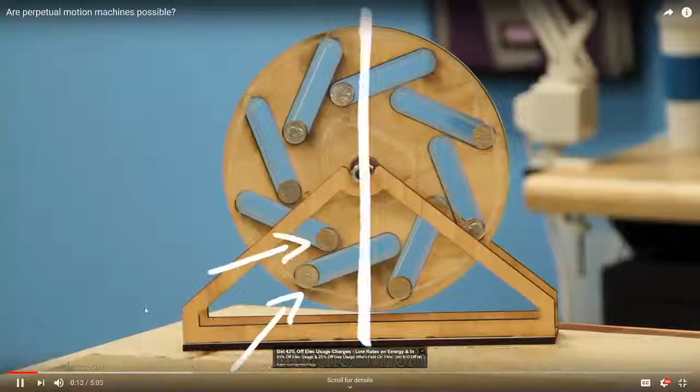What if I told you I built a machine that creates energy? My ingenious design works like this. As the wheel turns, the coins fall in the slots so that one side of the wheel is always heavier than the other, which would keep pulling that side down and the wheel would never stop turning. Without so much as a push, this wheel would spin forever. Think about the possibilities. I could build a giant fleet of wind turbines that turn without wind to power the entire Earth. We wouldn't have to burn fossil fuels anymore. This could solve climate change. So let's see it in action. Or not, because it doesn't actually work.

You may have seen this wheel before, and there's a reason it doesn't work. Well, physics, but also friction here on the axle, which will eventually stop any wheel from continuing to spin. But then there's also gravity. So what I said earlier about one side of the wheel being heavier than the other was misleading because of the way gravity works on wheels. Imagine a regular wheel. Its center of mass is at the center of the wheel.

Now imagine a wheel with a single coin in it. It might swing back and forth a couple times, but it won't rotate. Add a second coin, add a third coin. The wheel swings back and forth, slowing down until it stops where the center of gravity is at its lowest position, always. So the unbalanced wheel will swing back and forth like a sad pendulum until friction wins.

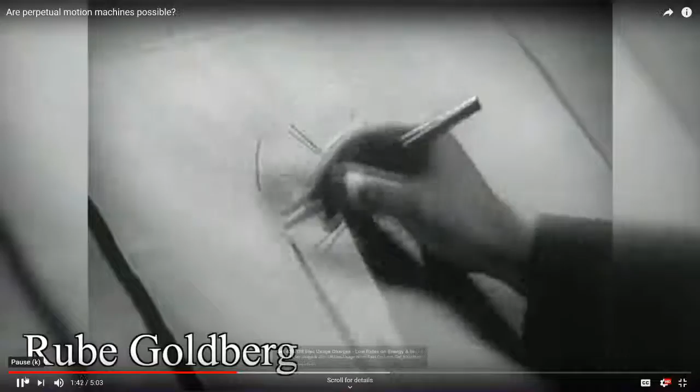This wheel is a perpetual motion machine, a device that is supposed to move without any energy. But by far the most persistent dream of inventors has been to get something for nothing. That is, to create a machine that will start itself, overcome all friction, and still have enough power left to do useful work. In short, perpetual motion machines.

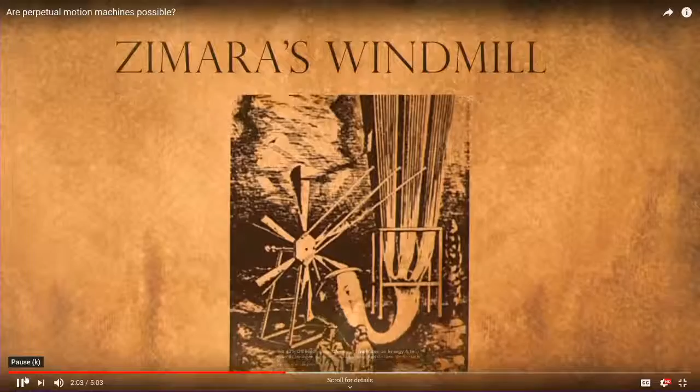In countless instances in history, people have claimed that they've made a perpetual motion machine. Bhaskara's unbalanced mercury wheel in the 1100s, Zimara's self-blowing windmill in the 1500s, the capillary bowl where capillary action forces the water upwards, the Oxford electric bell which ticks back and forth due to charge repulsion, and so on. In fact, the US Patent Office stopped granting patents for perpetual motion machines without a working prototype. The reason you've never heard of Cox's timepiece and you don't power your smartphone with a capillary bowl is that perpetual motion machines are the snake oil of physics. They are impossible.

This is the classic drinking bird toy. It tips itself into a glass of water, then rights itself and tips again over and over, looking forever thirsty. Where's the source of energy?

At room temperature, inside the bird is part liquid and part vapor. The bird contains a substance called dichloromethane, the same stuff in this little toy, which boils at a much lower temperature than water. When the bird dips its beak into the water, the bird's top cools down.

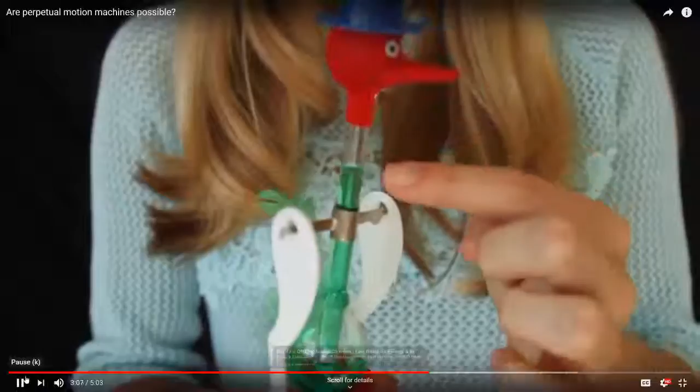Because of the ideal gas law, PV equals NKT, the pressure in the tube at the top of the bird is lower than the pressure in the bottom of the bird. This pressure difference pushes the liquid into the top of the head. The toy gets top heavy and tips over.

When the bird tips over, the bottom of the tube is exposed to the vapor, which rises up and pushes the liquid back into the bottom. The bird stands up and the cycle continues. But it's not perpetual motion. There is an energy source making this bird drink over and over, but it's hard to spot.

Yep, I'd like to stop here. So the question being asked is: there is an energy source actually driving the bird to tip and come back. Any idea? We will learn that in a minute, but any idea?

There is a hot reservoir transferring energy to the cold reservoir. What are the hot and cold? The hot source, maybe from where? Water.

That's the right direction of thinking. So where is the hot and cold reservoir? Yeah, that's pretty close. The ambient energy, which actually serves as the hot and the cold at the same time in this case. All right, that's good.

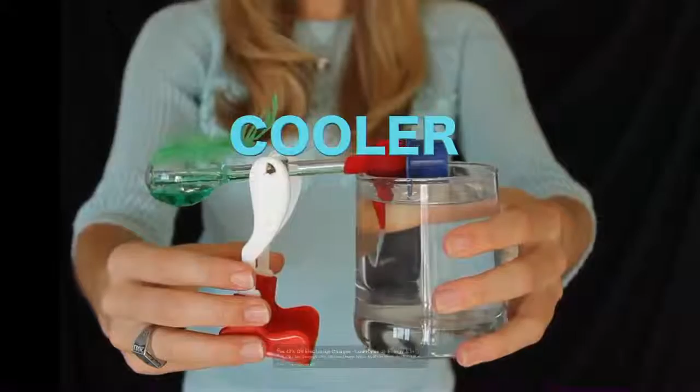The energy source for the bird is the ambient heat in the room. The water cooled the bird's beak, creating a temperature difference between the top and bottom, and that caused the pressure difference that made the liquid flow to the top and tipped the bird over. When the pressure equalized, the top and bottom of the bird became the same temperature, but slightly cooler than it started out. Then the room warms the bird up again, and that's where we see our energy source.

This back and forth between pressure and temperature is what causes Earth's weather. And though it seems like weather and wind and storms never stop, they're powered by the sun's heat. So even Earth's weather isn't a perpetual motion machine.

Now, there's a more fundamental reason why these machines are impossible, and it's called the law of conservation of energy, which states that energy can neither be created nor destroyed. Energy never comes for free. If you see a machine producing motion, heat, light, or another form of energy, keep looking for the energy source. I repeat, keep looking for the energy source.

So now you know. If anyone tells you they've built a perpetual motion machine, tell them to peddle their wares elsewhere. Thank you so much for watching.

It's all very simple. And so are you if you think it'll work. You can't get something for nothing. Yeah, so that's the main message coming out of here. You cannot get something for nothing. You have to, energy has to be balanced. So the in and out, or either generation, storage has to be balanced.

For this type of machine, if you want to know how it works, generally there are two ways. One is you give it certain energy to start with, then during the process there is very little loss. For example, for those unbalanced wheels, when turning, it must be sitting on an axle which is very well lubricated, so the wheel can run for a long time. So the loss is very small.

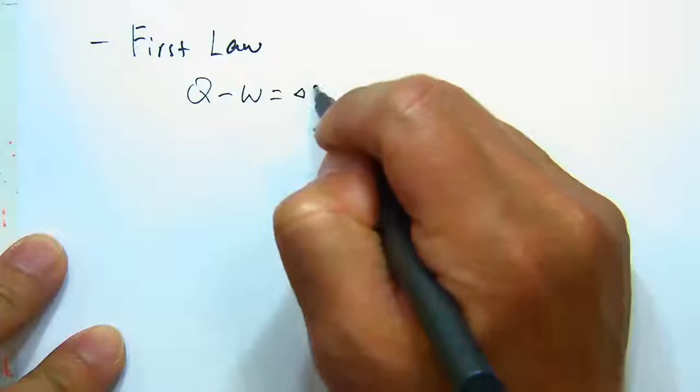All right, so the first law, we look at the equation of the first law, which is Q heat minus work equals the change in internal energy. That's applied to a closed system. The closed system is a simple compressible system, which is all the systems we encounter in this subject. And if you have an open system, which has a steady flow constantly going in and out of the system, there is another equation for that.

In this case, because the flow is going in and leaving the system, it requires energy to be pushed in and pushed out. So there is a term called flow energy, which stands for delta PV. Combine these two, you get the delta enthalpy.

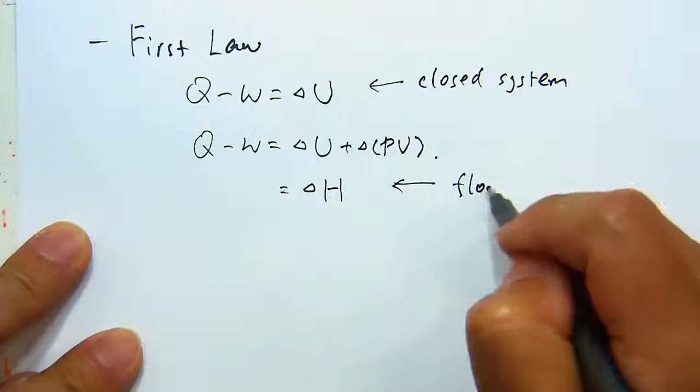All right, so this applied to the flowing system, or you can refer to it as an open system. So this equation, in certain textbooks, is called the non-flow energy equation, and this one is called the steady flow energy equation.

We said work and heat are path functions. Their change is determined by which route from one state to the other, so to determine them you really need to know how the process goes. But the energy terms, energy and enthalpy, are state functions, so they can be more directly, more straightforwardly calculated.

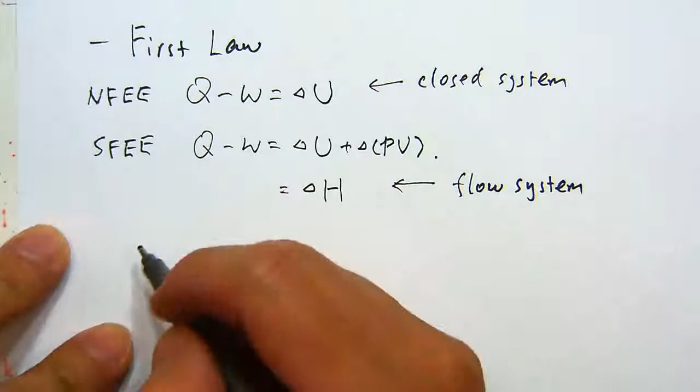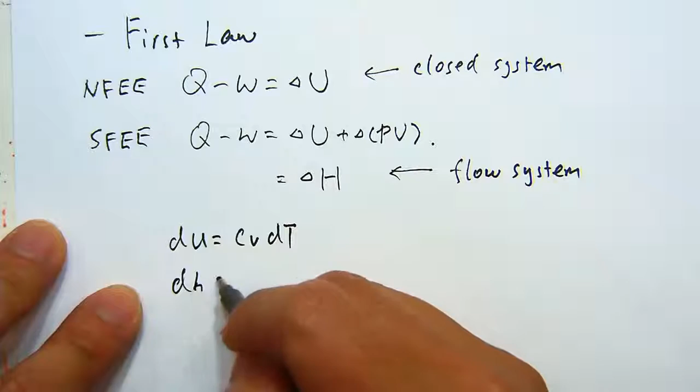So we know that dU, changing the internal energy, can be written as Cv dT, specific heat measured under constant volume condition, and the dH can be written as Cp dT. That should come from your previous learning. So Cp and Cv are the specific heats measured under different conditions.

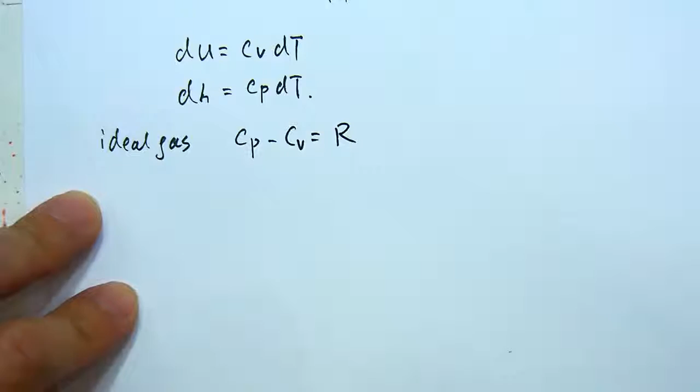And for gas, there is a clear difference between these two. So if we're talking about ideal gases, which are the gas we deal with here, ideal gas has a different Cp and Cv. Cp minus Cv equals the gas constant. And this gas constant can be calculated from the universal gas constant divided by the molecular weight of that gas. The universal gas constant is 8.314 joule per mole per Kelvin.

Right, so for ideal gases, Cp and Cv are different, and their ratio is called gamma, the ratio of specific heats. Because Cp is larger than Cv, gamma is always larger than 1. And there are some theoretical values known for this gamma.

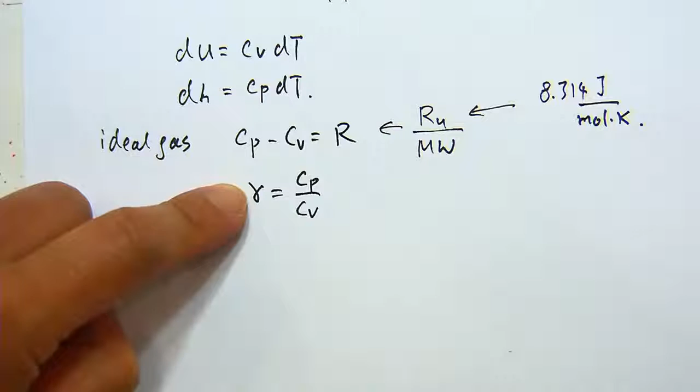So if you have a monoatomic gas like helium, argon, for those noble gases, the gamma is 1.67, basically 5 divided by 3. It's coming from statistical thermodynamics, but we don't really need to remember that here.

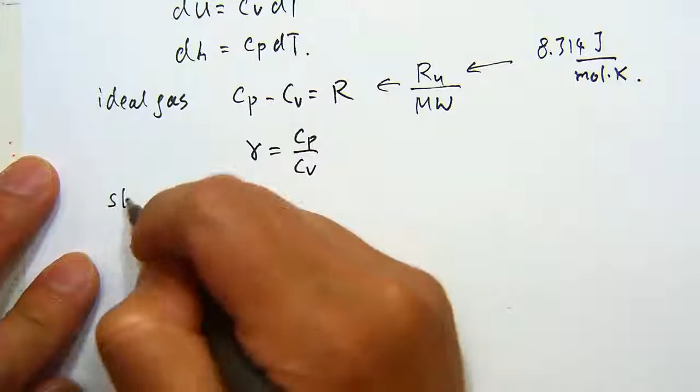For condensed matter, solid and liquid, the Cp and Cv are very similar. So in that case, when you want to determine the change dU and dH, they are basically the same, very similar at least, regardless of whether it's internal energy or enthalpy.

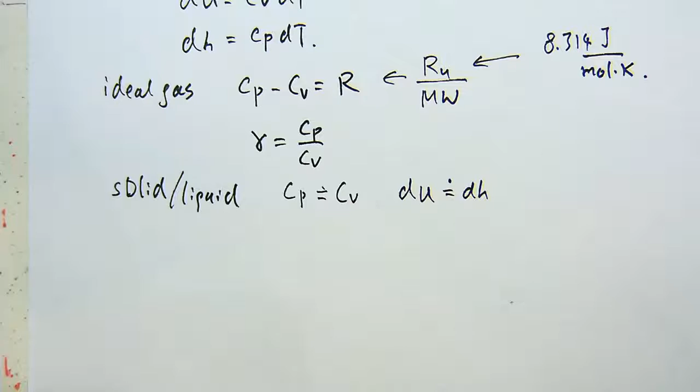All right, so that's the simple relations that we want to be aware of, and that's mainly coming from the first law.

Again, the first law is about energy balance. We said energy can be converted, thermodynamics is about energy being converted in different forms, then being transferred in and out of the system, with its surroundings. The first law just says everything has to add up to be equal. The source term and the sink term have to add up to be equal. Whether this form of energy is in terms of heat or work or chemical energy, it doesn't matter. As long as it's one form of energy, that which adds up together has to be equal. That's what the first law is about.

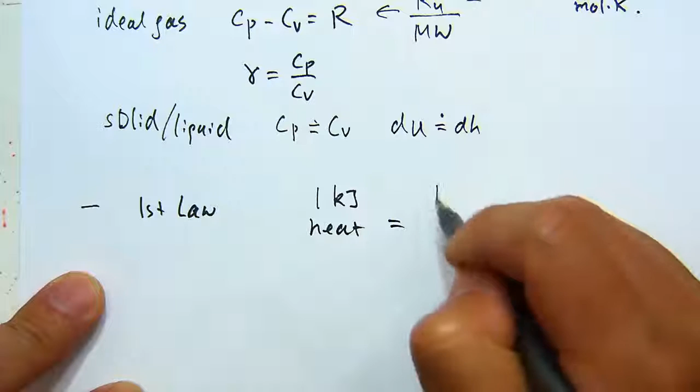So for example, if I have 1 kilojoule of heat, that equals 1 kilojoule of work. That's required by the first law, and that was actually proved by the person called Joule, James Joule.

His name is used to name the unit of energy, and it's the other way around - he actually designed an experiment to prove this. At that time, people didn't really know the first law, that 1 kilojoule of work equals 1 kilojoule of heat. People didn't really know that. So he did an experiment to prove that concept, that energy in different forms are equal, at least in terms of work and heat.

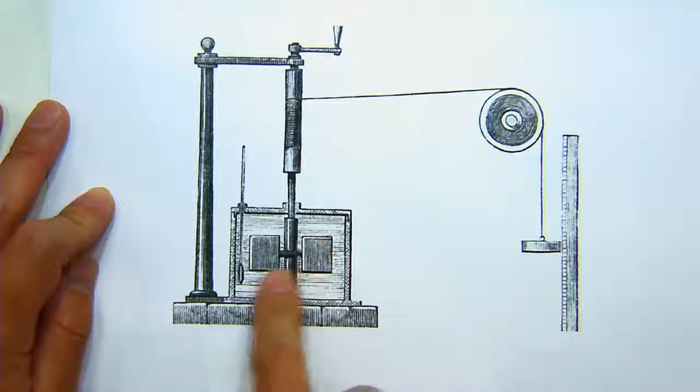So this is his experiment. What he did is he has a weight with a string attached, going through a pulley, and this pulley is driving a paddle, and this paddle is in a water tank. The water has some mass inside the tank, and you have a thermometer to measure the temperature.

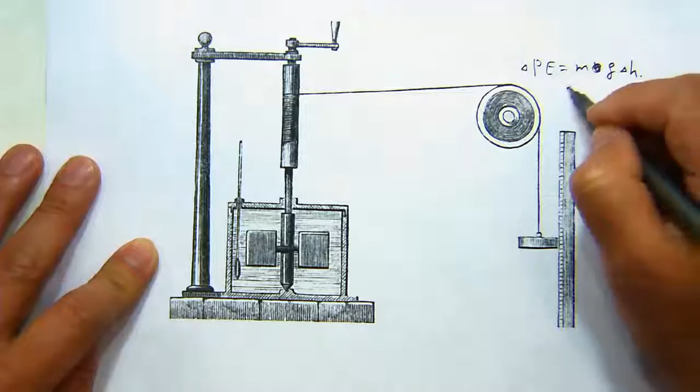So by his experiment basically, when this weight goes through a certain distance in terms of height, you have an energy which is potential energy, change in terms of mg delta h, right?

So based on the distance this weight traveled, you can calculate how much potential energy it released. And then this energy, assume there is no energy loss, so he designed the system so there is very small friction. So all this potential energy goes here to become kinetic energy, which is driving this paddle. And when this paddle is turning, the kinetic energy is being converted to heat or thermal energy to the water. And that one can be measured through the thermometer.

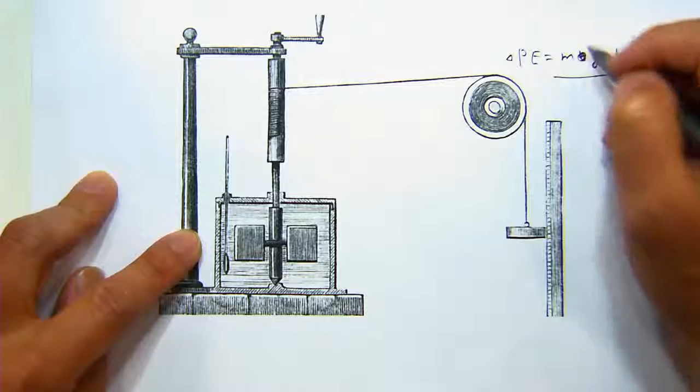So from here you have the weight, mass of the weight. And here you can have the energy which is Q equals to mc delta T. So that's mass of the water. So these two, they found they are equal. Both can be accurately measured in terms of temperature, with a known Cp and a known mass of water. So found that these two are equal.

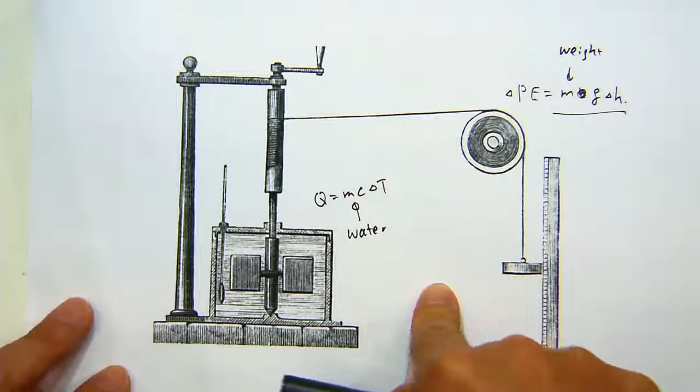Basically proved that 1 kilojoule of work equals 1 kilojoule of heat. So that's a pretty famous experiment called the Joule experiment. Basically proved the first law.

So we want to mention this because there is a big difference in terms of the second law. If we're talking about the second law, it's saying that even though in terms of Joules they are the same, in terms of the capability to do work, they are not the same. So if I have 1 kilojoule of heat, that does not equal 1 kilojoule of work.

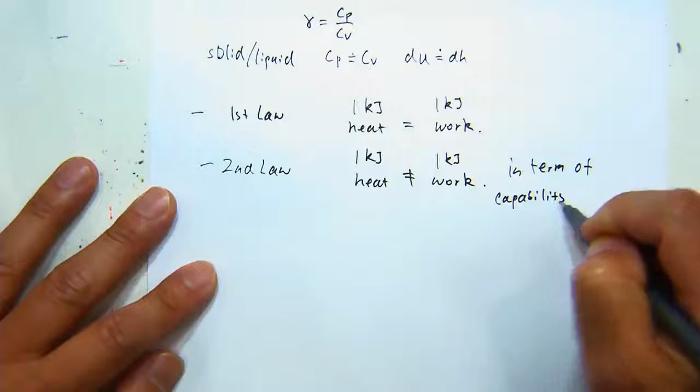That is in terms of the capability to do work. So 1 kilojoule of mechanical work, if you already have it there, can be directly converted to useful work in this sense. But if you have 1 kilojoule of heat available there, it cannot all be converted to mechanical work. So this is what the second law is about.

The essence of the second law basically is saying that different forms of energy are not equal, right? Like the first law, everything adds up together, being the same. So in that process, all types of energy are being treated equally. But if you consider the capability to do work, different types of energy have different quality and different capability to do work. So that's mainly what this second law is about.

And there is a note to add: different energy forms are of different quality. Certain energy forms are considered high quality. Mechanical certainly is one. Electrical is also one. Chemical is generally considered pretty high quality. Thermal energy actually is the lowest quality of energy in terms of doing work.

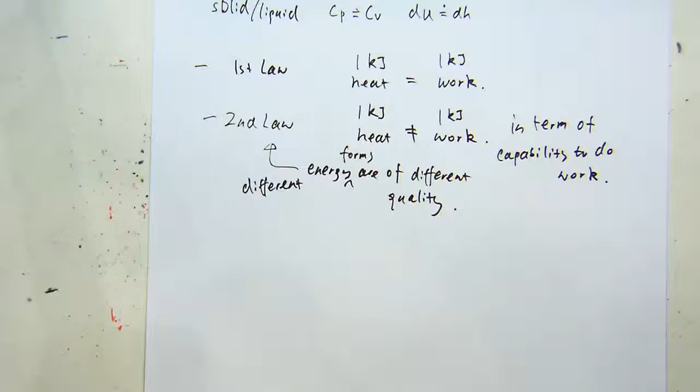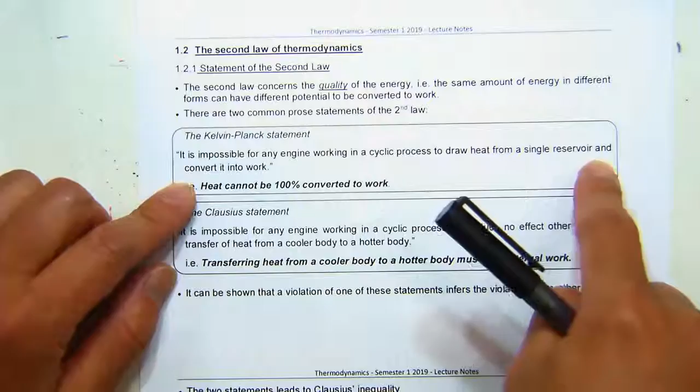So that's the general idea, and there are two statements. When people discovered this, again, this was not known before. This came through numerous experiments and experience. People summarized this type of law. One is called Kelvin-Planck's law. It states that it's impossible for any engine working in a cyclic process to draw heat from a single reservoir and convert it entirely to work.

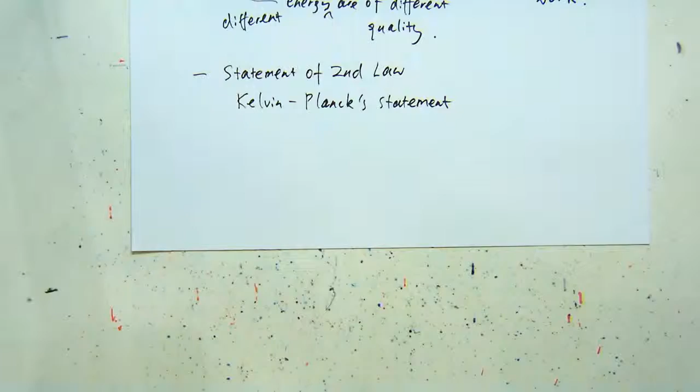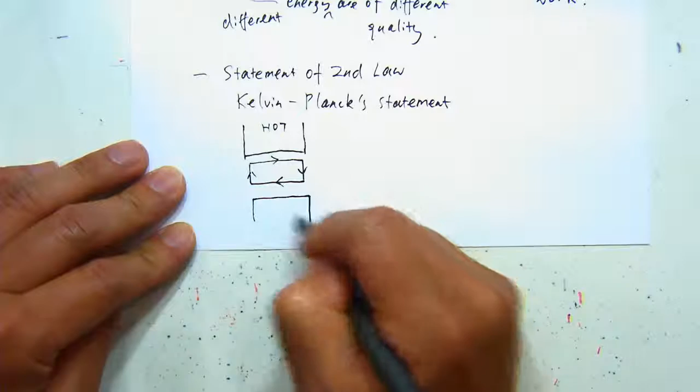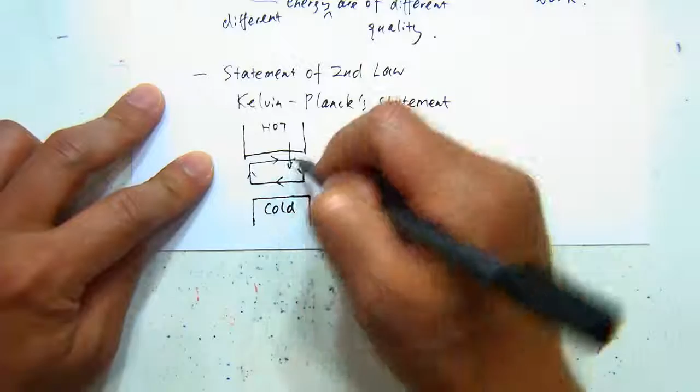All right, so let's draw a schematic to show this. This one is saying that if you have a cycle, like if we consider our engine running on a cycle, going in this direction and working between two temperature reservoirs, one hot, one cold. So if we have the process running so that the cycle is picking up heat from this hot reservoir, which we call QH.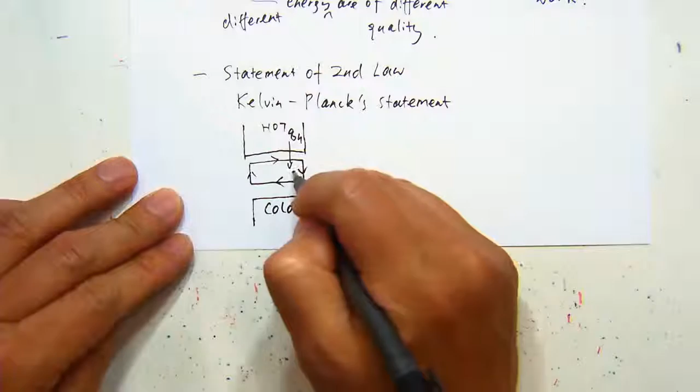This is like when you have a combustion process - combustion happens to convert chemical energy to thermal energy, and then you're picking up the heat from the process. Then you want to do work, right? The purpose of the engine is to do work.

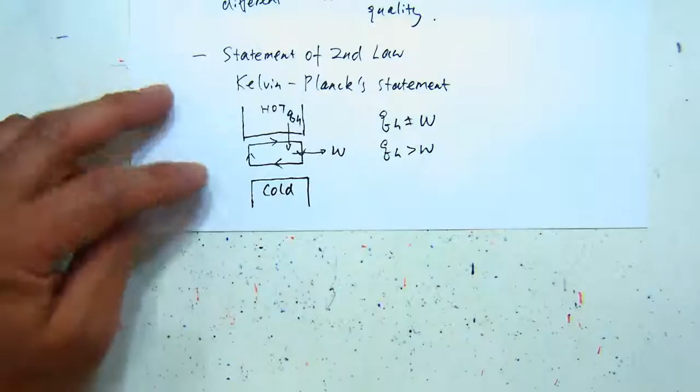The Kelvin-Planck statement is saying that QH is not equal to work. Actually, QH is much larger than work, and there is always a certain amount of heat or thermal energy that cannot be used in the process, then needs to be dumped into the low temperature reservoir. So that's why it's saying it's impossible for any engine working in a cyclic process to draw heat and convert it entirely to work from a single reservoir. You must have a hot and a cold reservoir.

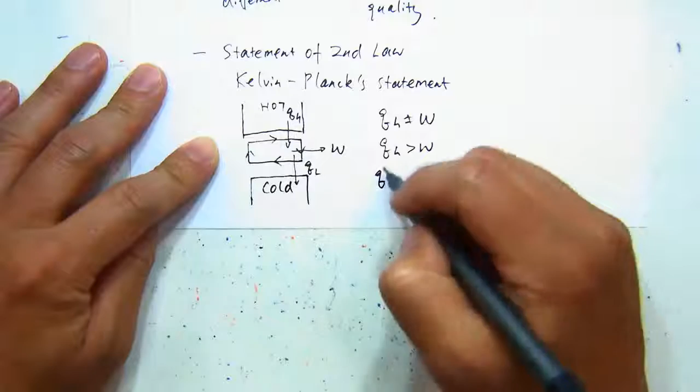Picking up the heat from the hot reservoir and then doing some work, you must dump certain heat to the low temperature reservoir. You cannot convert all those heat from the high temperature reservoir to work. So that's the statement of the second law by the Kelvin-Planck's statement. The balance here is QH minus QL equals to W. You only can convert the difference between these two heat streams to work.

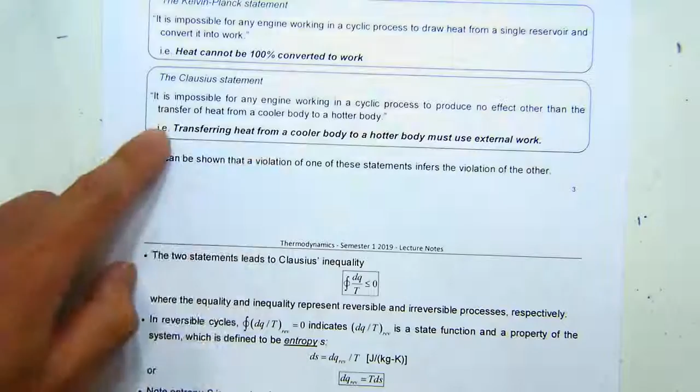And the other one is working in the opposite manner from the Clausius statement, that it's impossible for any engine working in a cyclic process to produce no effect other than transferring heat from a cooler body to a hotter body. So consider if you want to remove a certain amount of thermal energy from a cold reservoir and dump it to the hot reservoir.

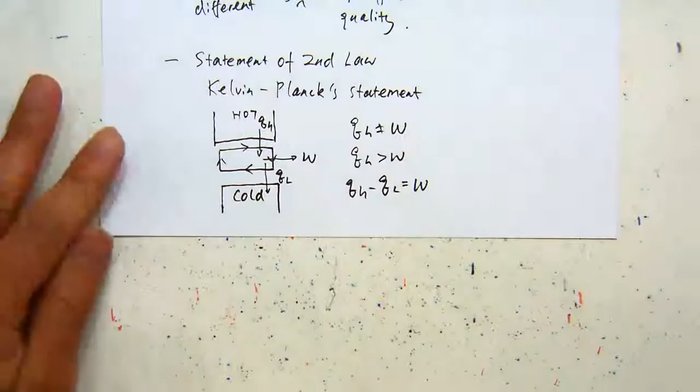This is like a refrigerator working principle, right? So in this case, if we draw the schematic again, you have the cold and hot, and the work engine is running in an opposite way. I mean, we call the engine basically a thermodynamic cycle, right?

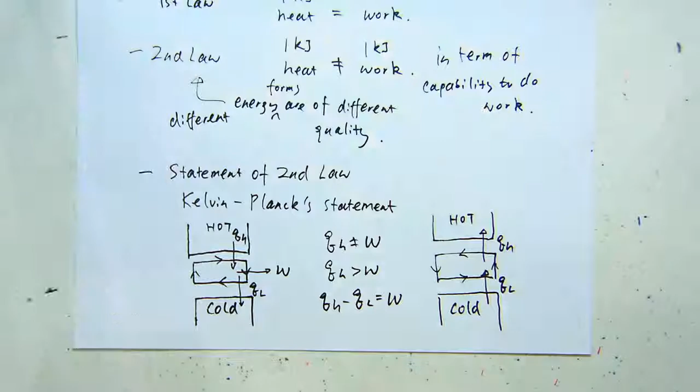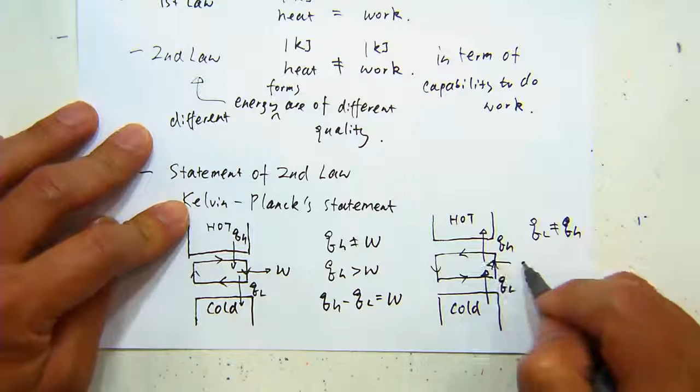So if you want to pick up certain energy from the cold reservoir, and you want to move it to the high temperature hot reservoir, this case is saying that QL cannot equal QH. You have to input some additional work in order for this case to happen.

Even though what you want to remove, QL, is only 1 kilojoule, you cannot completely dump that 1 kilojoule to the hot reservoir. You have to input some useful work and dump the sum of these two to the hot reservoir. So in terms of the equation, QH must equal QL plus some useful work.

So these are two statements, basically saying the same thing. People state the same principle, coming from different perspectives. And because of the second law, you will never see a car exhaust as cold as ambient.

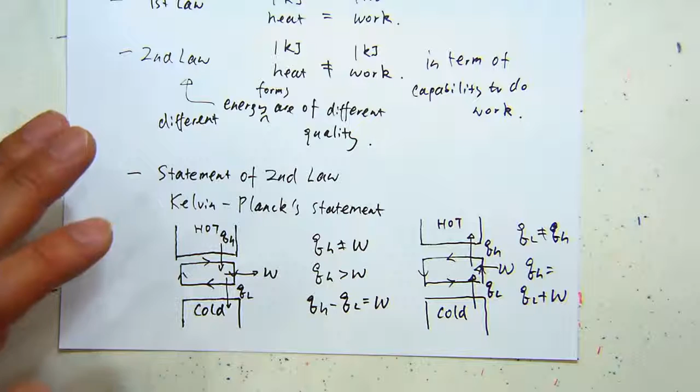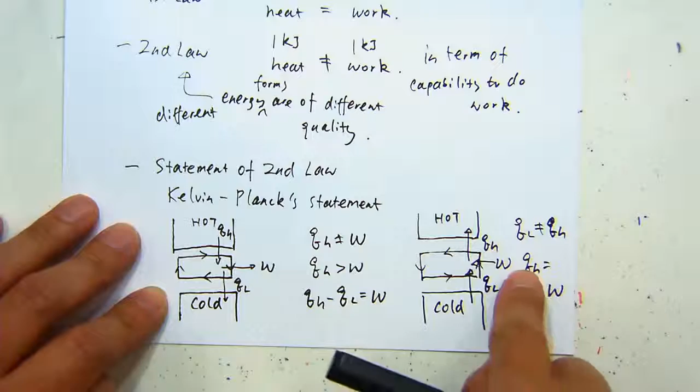Engine exhaust is always hotter than ambient. That is due to this QL will never be zero. The QL must be positive to dump into the cold reservoir, which is ambient, in order for this process to happen. And also, when you have a fridge, if you ever pay attention in terms of how the refrigeration cycle works, a refrigerator always requires a compressor in order to work. That compressor provides this additional external work in order to move the energy from the cold reservoir to the hot reservoir.

We'll discuss more when we're talking about the specific cycles. But the second law is universal, and it always shows itself in certain ways. All right, so that's the statement.

In terms of study, we always need equations. So the mathematical expression of the second law has been developed, and that's called the Clausius inequality. Basically it's saying that if you have a cycle, a process, reflected in this circle here, you integrate the total heat transfer over a cycle. There always will be no greater than 0, either negative or equal to 0. So that's the expression of the second law.

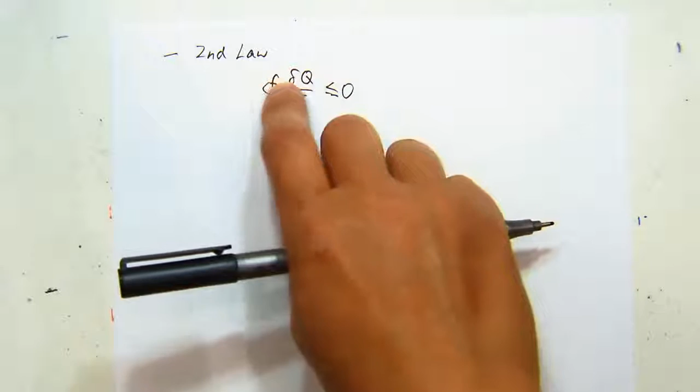For all practical processes, the unequal sign will apply. And only for some ideal process, called the reversible process, will the equal sign apply. So in reality, all processes go this way. If you have a cycle, you always will be losing heat to the surroundings, right? And it's similar to this case.

I should say all real or practical processes are irreversible. That's just like time. Time is always going in one direction. You cannot go back in terms of time. So you can consider the process along time is always irreversible, right? So that's part of what's reflected in all practical processes being irreversible.

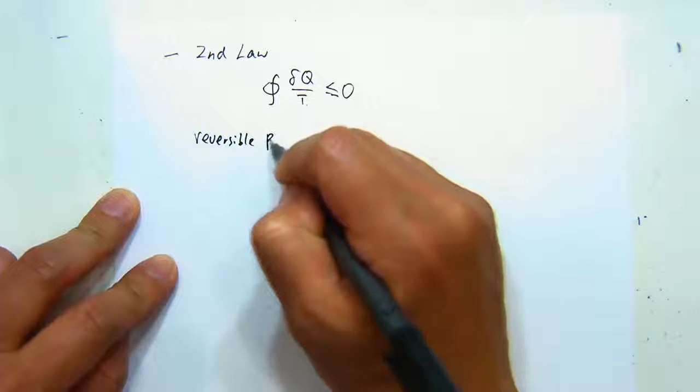But we do have an ideal case. For a reversible process, it's something saying that the process happens very, very slowly. Again, it's an ideal case. At any point, if you want to go back, you can go back, and the whole situation will return to the previous condition. So that only happens in ideal conditions. So for a reversible process, this equal sign can apply.

Equals to 0. So now people recognize there is something new here. So if you have a property, if you're going through a cycle, which means the start and end point are the same, and its change becomes 0, there is no change, which means this should be a state function, not a path function. It's a state function because its starting and end are the same, and for the state function there should be no change. So people realized that for a reversible process, this property now becomes a new state function, and that new state function is later being defined as the entropy.

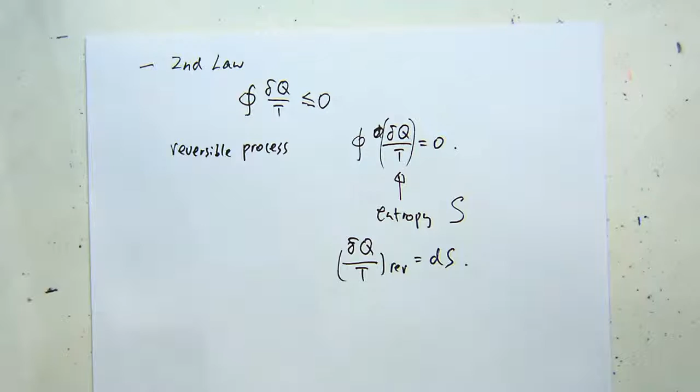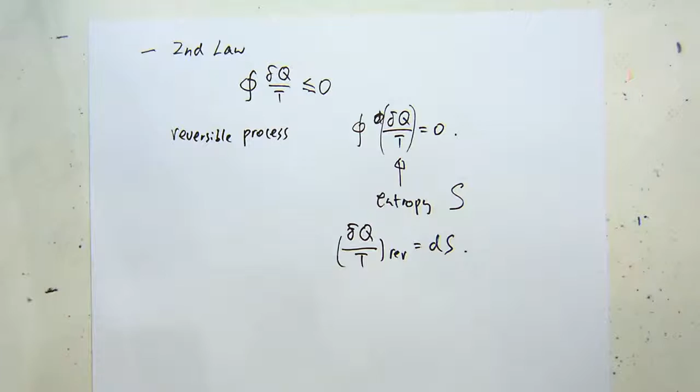Entropy is always a challenging concept in terms of understanding. It's different from energy, but people have put some physical meaning to it. In terms of a straightforward way to say it, entropy is a disorderliness of the system. So how disordered the system is, you can characterize that using entropy. So entropy can be understood as a measure of disorderliness.

In other words, it's a measure of freedom in a system. So if the component or constituent in a system has a lot of freedom within the system, if the system is more disordered, then you have more entropy in the system.

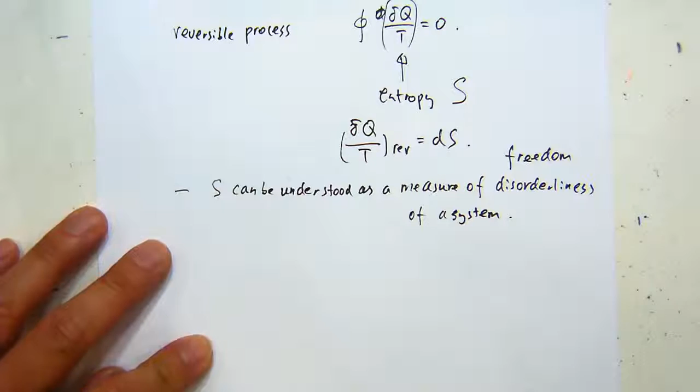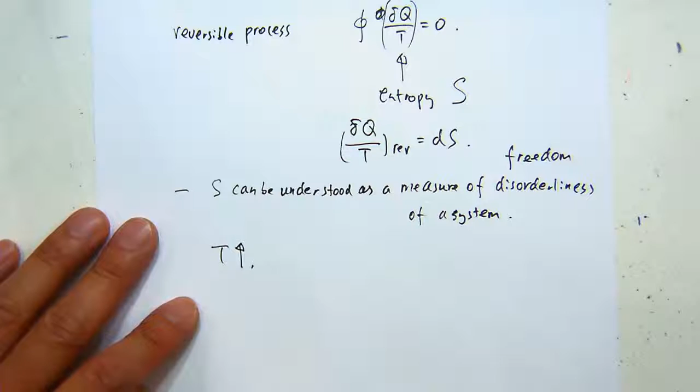So in that regard, if we increase the temperature, how will the entropy change? Well, it goes up, because there is more freedom in terms of the gas molecule, or whether it's a solid or liquid, for the molecule inside the system to move around. So entropy will go up.

How about pressure? When the pressure goes up, it will suppress the movement of those molecules inside the system. The entropy should go down, right?

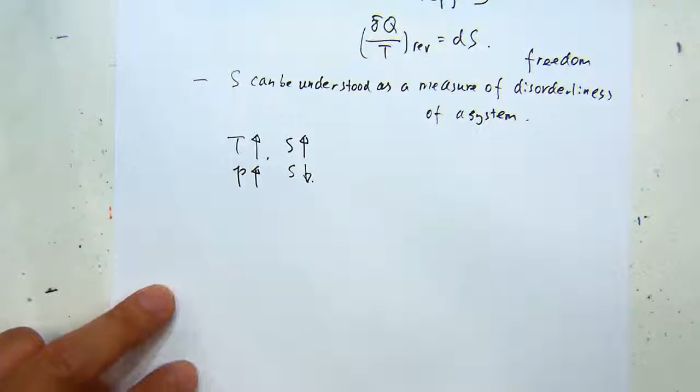And if you have a phase change, for example, if you have liquid water becoming steam, becoming a vapor, that process will give you a higher entropy. And the other way would reduce the entropy. So if you understand the process, entropy as a disorderliness of the system, when this system condition changes, you can have a general understanding, a qualitative way of how they are going to change.

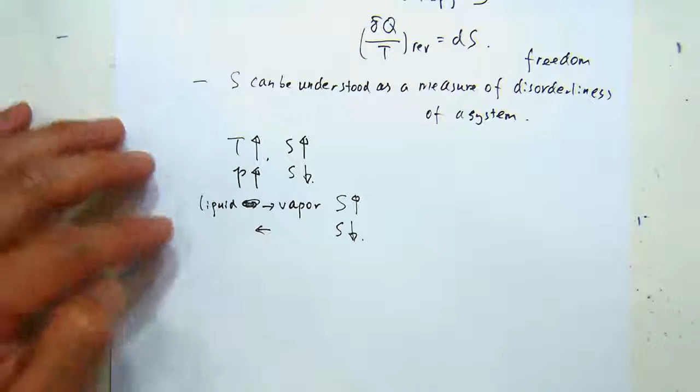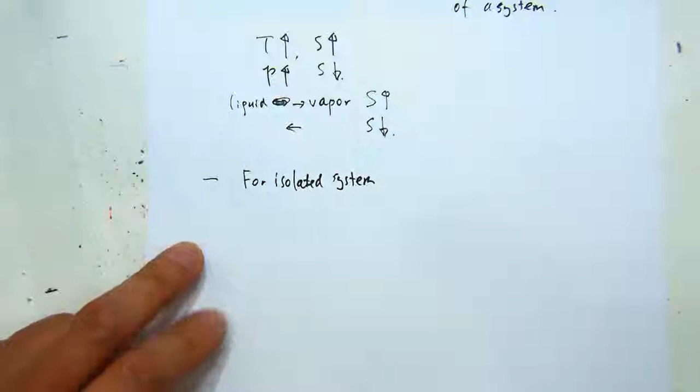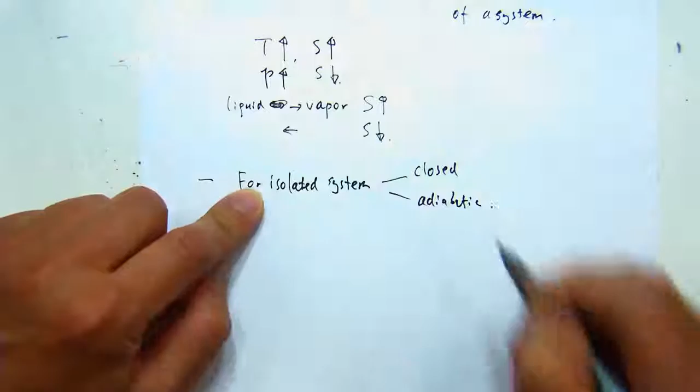One thing I should add before we move to the equations: if you have an isolated system, an isolated system is quite a special system. An exact example of an isolated system does not really happen very often. You can consider the universe as a whole as an isolated system, because it has to be a closed system and adiabatic, satisfying two conditions.

Basically this means the system is isolated: it doesn't have mass exchange with its surroundings, and also does not have energy exchange with its surroundings. So it's closed and adiabatic. For an isolated system, people have already found that the entropy of that system always goes up. This has been proved, and it can actually be proved pretty easily, and I think that's the first tutorial question in the first tut.

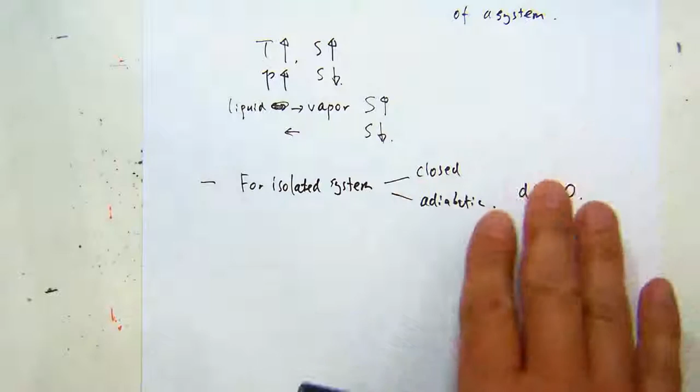So there it will be demonstrated why for isolated systems entropy always goes up. So to understand this, it's actually considered as a part of nature. By nature, things always tend to have more disorder. Things become more disordered.

So if you just move into a new place, everything is tidy and things are in the place they should be. But over time, what happens? In general cases, things will become messier and messier. Things will be laying around and certainly not always at the place they should be. So you can think of that as the second law in action. Although your room is not necessarily an isolated system, in general, by the second law, things just become more and more disordered. And if you want to reduce the entropy, you have to put in extra additional effort in order to correct this trend.

All right, so that's a tutorial problem, which we are going to prove.

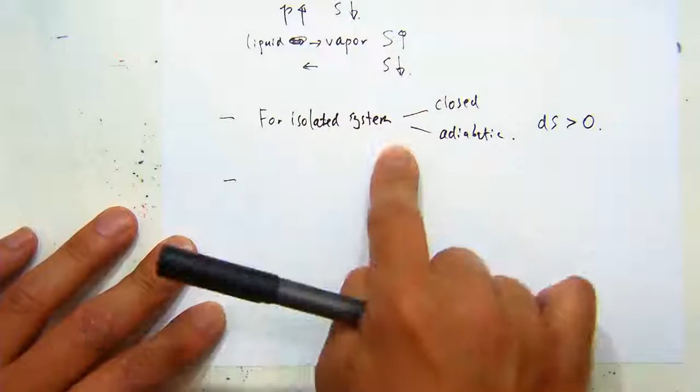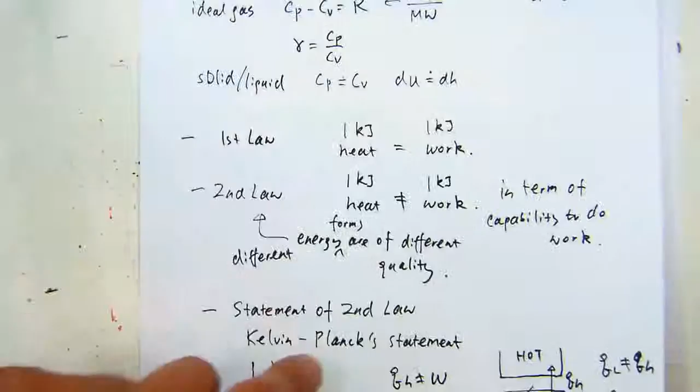So entropy is a new state property, a state function. So how do we calculate it? We know how to calculate the internal energy and enthalpy using the equation with Cv and Cp. How do we calculate another state function which is entropy? That's the thing we're going to discuss here.

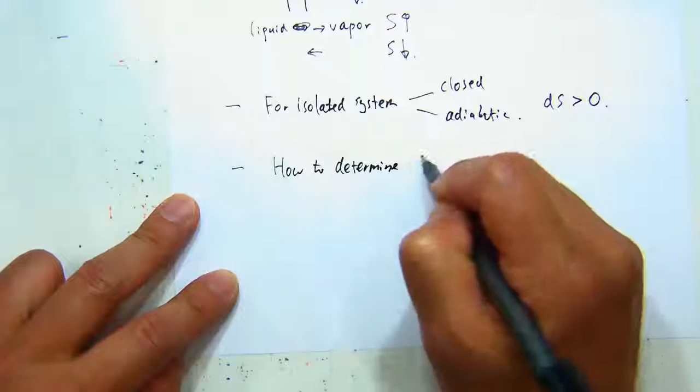Or more correctly, changing the entropy. Again, similar to the energy term, only change matters because the absolute value really depends on what reference state that you choose.

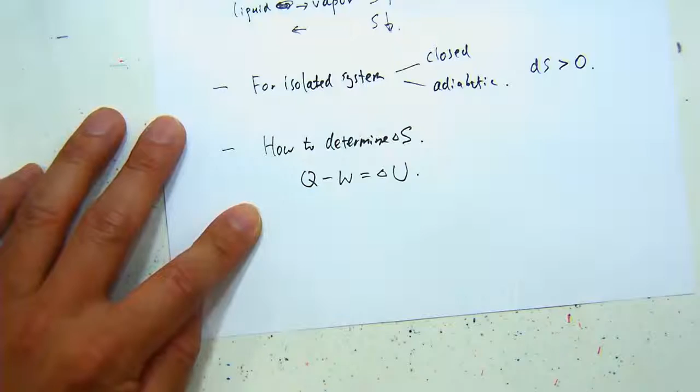To determine the changing entropy, we combine the first and the second law. From the first law, we have Q minus W equals to delta U. So if we consider this is a closed system, and we consider it's a reversible process happening to this closed system.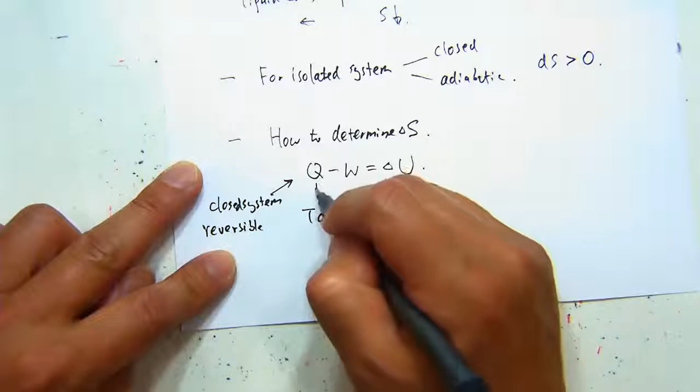For the reversible process, then we can express the heat in terms of the entropy, TdS. This is only because you have the Q for a reversible process. Then you have Q equals to TdS. For an irreversible process, they are not equal.

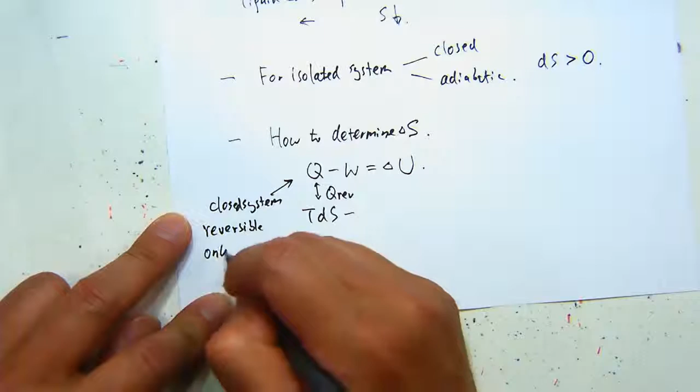And then if we consider the work term, there is only boundary work being done. Boundary work means, for example, you have a setup of a piston and a cylinder. So when the gas inside the system becomes hotter, it will push the piston to move.

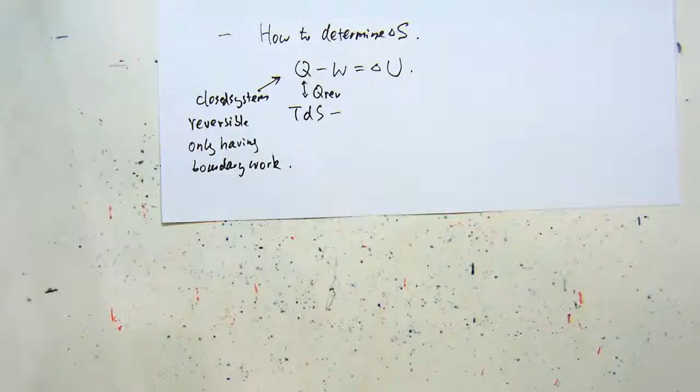That changes the boundary of the system, and that work is called the boundary work. It does not involve shaft work or other types. Does not involve shaft work. Does not involve electrical work. So it's just the work related to the system boundary expanding or shrinking.

So in that case, we can write the work as PdV. The pressure push the volume change. And then we have the change in internal energy. We can write it in terms of Cp dT. So I should be more careful in terms of the signs here.

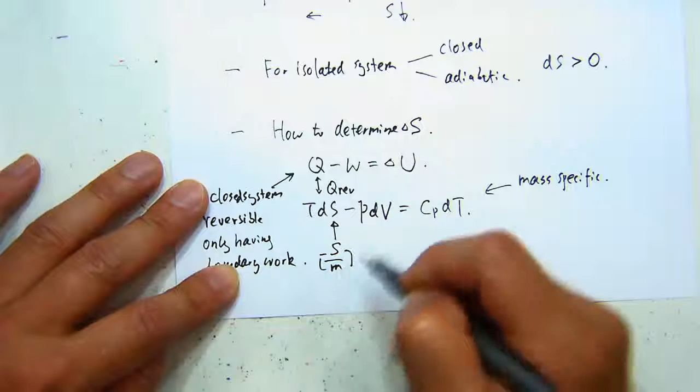So I want to write it in terms of the mass specific form. In other words, this ds is a capital S divided by the mass already, and this volume is a capital volume divided by the mass. So here I don't need to write mCp dt there.

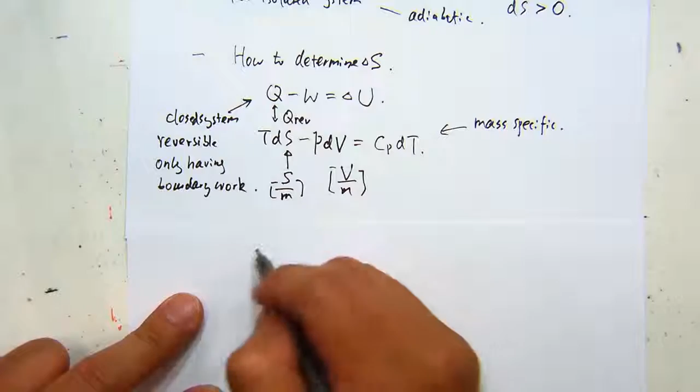All right, so if I do this, with a few steps of derivation, we can get the equation to calculate the entropy change. So we have TdS minus PdV equals to Cp dT. Then I have dS equals to Cp/T dT plus P/T dV. All right, so I want to

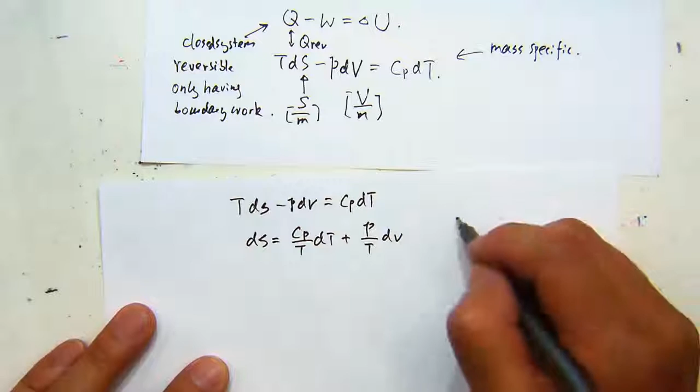rearrange this term using the ideal gas law. So from the ideal gas law, we have PV equals mRT. If I move the mass to here to make it a mass specific volume, then I can write P/T in terms of R divided by v, this being the mass-specific volume. Then I can bring it here: Cp/T dT plus R/v dV.

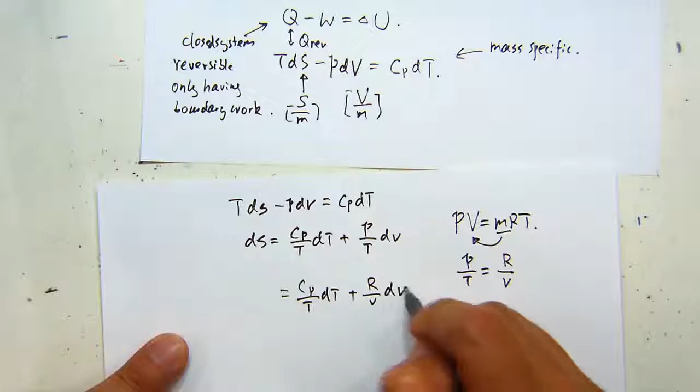So then I got the differential form in terms of entropy equals to this. What I need to do is just integrate from one state to the other. Then I have S2 minus S1 equals to Cp log(T2/T1) plus R log(v2/v1). So that's the first equation that we come up with to determine the entropy change.

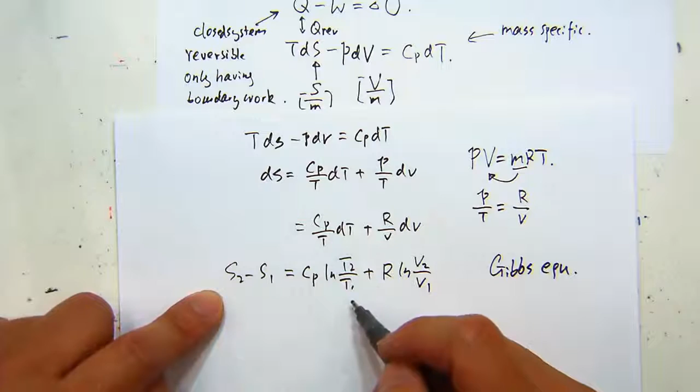So this equation is called the Gibbs equation. And we are going to derive a second form. The first form is like this. Basically the change in entropy from one state to the other can be determined from the change in temperature, which can be relatively easily determined.

Temperature from one state to the other can be determined, times the specific heat, then the change in volume from the first state to the second state, times the gas constant. So then this entropy can be calculated from properties that can be easily determined.

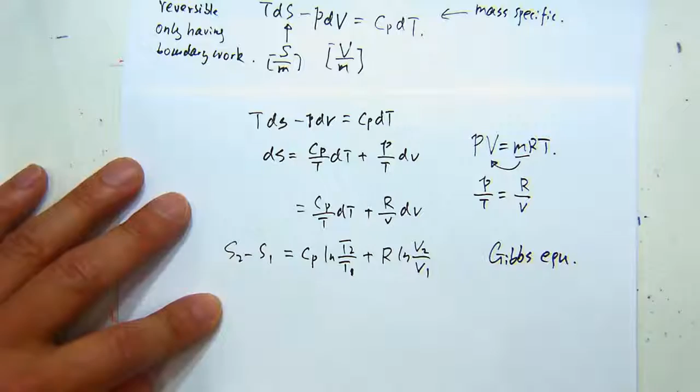The second form of the Gibbs equation is pretty similar, based on the same principle, except it deals with internal energy. Sorry, I think I made a mistake here. This should be Cv, right? Should be Cv rather than Cp because we're dealing with internal energy.

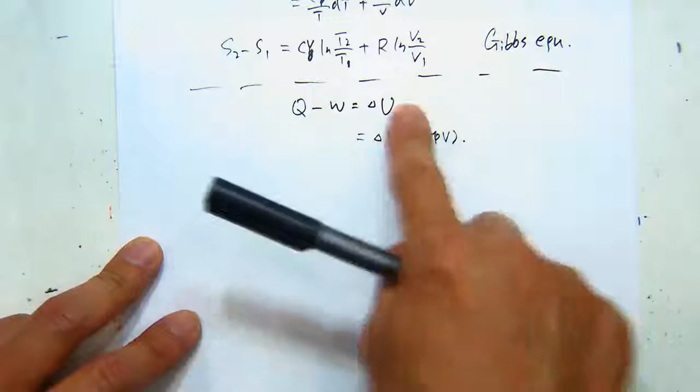The second form, I can quickly go through. Again we have Q minus W equals delta U. In this case, I write delta U in terms of the enthalpy minus delta PV, since H equals U plus PV. Then I remove the Q.

I can still write it in terms of T ds for a reversible process, and then the delta H. More specifically, dH minus P dV minus V dP, then plus the work term. The work term I move over, giving a P dV term, so these two get cancelled. I only deal with dH minus V dP there.

Following the similar procedure I just showed, I can get ds equals Cp log T2 over T1, minus R log P2 over P1. This one is also called the Gibbs equation.

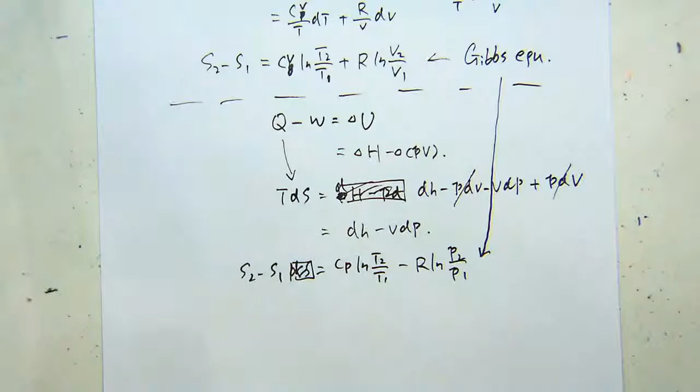This is based on the same principle, just expressed either in terms of temperature and volume, or temperature and pressure. So the purpose of the Gibbs equation, S2 minus S1, is to calculate the entropy change, which is a pretty abstract concept, in terms of more common properties of the system.

From here you can confirm what we discussed earlier about how entropy changes when system conditions change. If the temperature goes up, this term becomes higher, so the entropy should go up. For P2 divided by P1, if the pressure goes up, this term becomes larger, so the entropy change will change in the negative way.

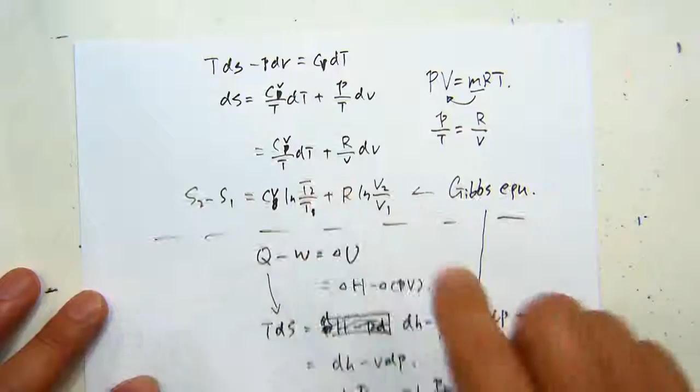Looking at the volume term, it has a plus sign in front of it. If the volume of the system changes, meaning there is more freedom for the species inside to move around, then the entropy should also go up. So that theory confirms our intuition. All right, that's all for today, let's continue Friday.